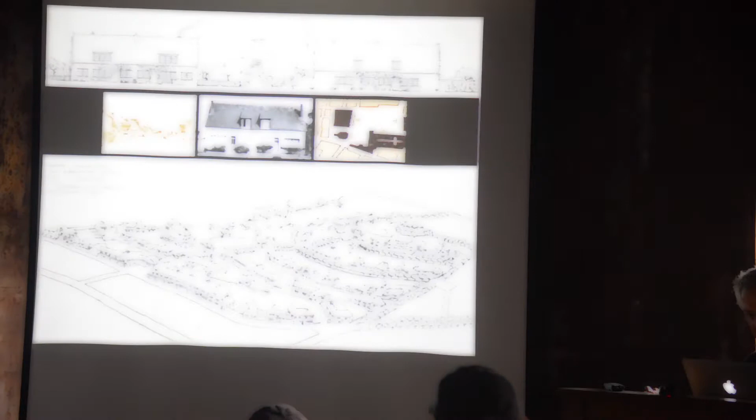By the way, Le Corbusier was quite a good town planner. This is one of his garden cities. If you look at this, I'm editorializing here, but this garden city, coming down a hill, is actually so much more fabulous mechanically than Raymond Unwin. You can see he's a great architect.

What's important is that we're talking about a really brilliant architect, this kind of thing. And of course, he became obsessed by this kind of stuff. By the way, note the car, great coincidence, etc.

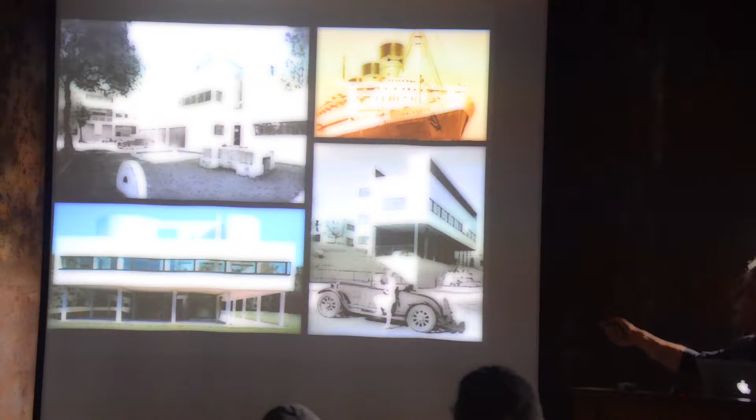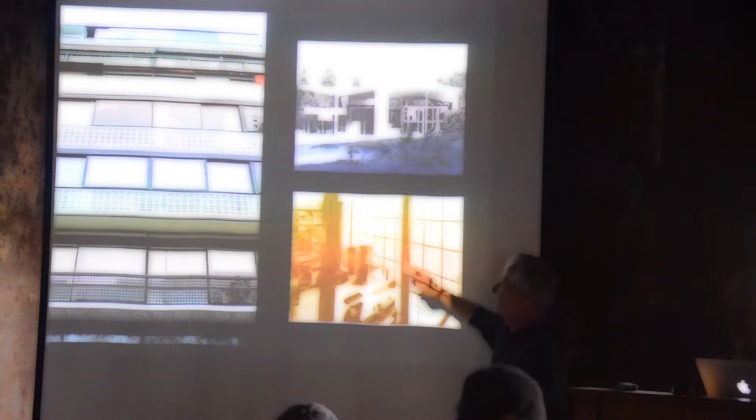He became obsessed by, this is Pierre Chareau. By the way, this is a fantastic building in Paris, done in the 20s, that I think should be considered a classical building. It's steel, beautifully built, full of metal craftsmanship. This is the Maison de Verre, Pierre Chareau, great tile, great concrete, great glass block, etc.

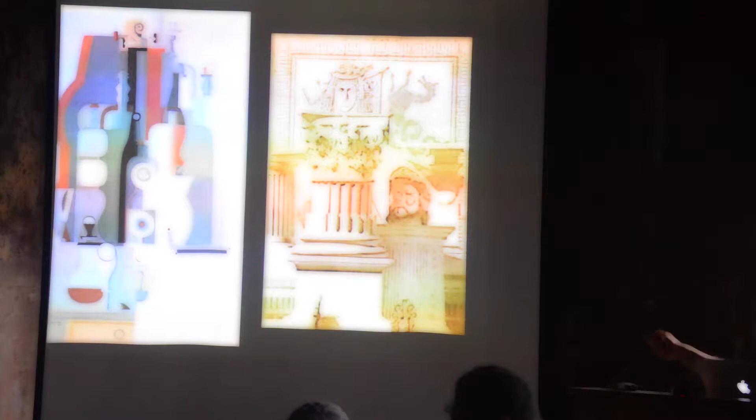He was a great machine aesthetic, and then he goes on to denigrate Le Corbusier and say that his obsessions became sicker and sicker, like the Béton Brut. Actually they were all obsessed by the Nazi coastal defenses, the fortresses. Le Corbusier knew very well what traditional architecture was like.

Including what's it called, this exercise, the analytique. This analytique actually forms the basis of all his paintings, which, by the way, in Leon's opinion, Le Corbusier is one of the great modern painters of the 20th century, not one of the great architects. And I actually would agree with him.

He did many, many paintings, and they're absolutely extraordinary. Leon, by the way, who is a brilliant original genius, actually spends a lot of time copying his paintings, which goes to show you what tradition involves.

Like he, you know, Leon can paint a traditional scene. He can paint a landscape like anybody else, and he also paints the Le Corbusier. His house is full of these Le Corbusier paintings that he did himself.

And then the Maison Domino. By the way, this is one of Leon's. This is something we should know. Leon's many drawings is what converted urbanism.

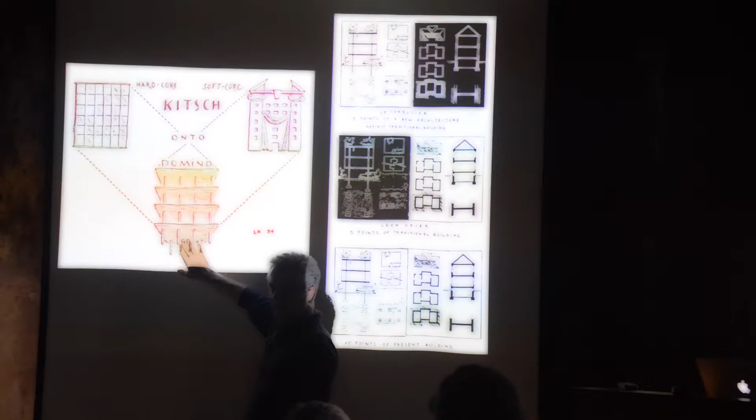These are sarcastic little cartoons. And I think there's a book by MIT, called Drawing for Architecture by Leon Krier. Out this year, very inexpensive, red cover.

And in it are all the 50 to 80 diagrams that explain everything about architecture in almost a cartoonish way. And it should become the fundamental... you know, they're very thick Leon Krier books.

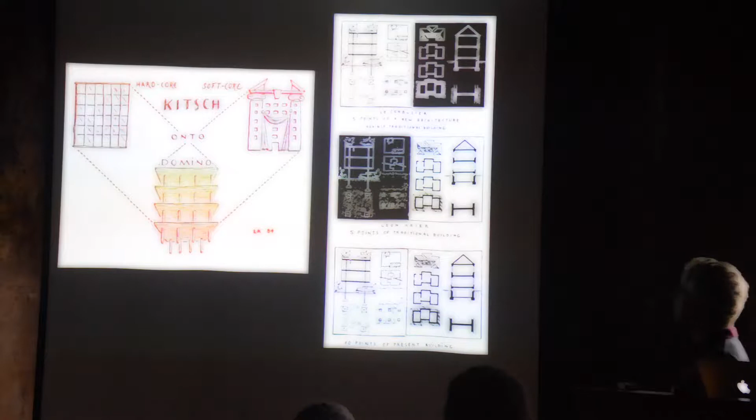But all the cartoons have now been collected in an MIT book that I think should become one of the great textbooks, if not the textbook.

And look at Le Corbusier's polemic: bad, good, you know. And this is where he presents the houses on pilotis, the independent structure, all of these things. Basically, this is the thing. This is the Le Corbusier: good, bad.

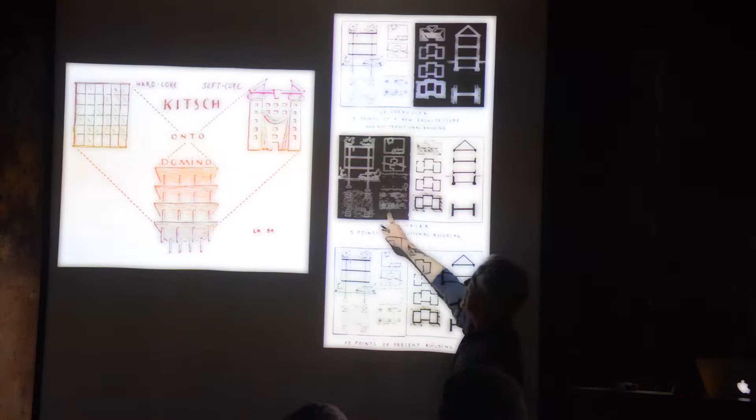And then he says, what Leon says is, this is presented as bad and that is good. And basically what he did is he takes Le Corbusier and reverses it, saying, this is like the bad one that I have to improve. He takes these and says, I've got to make them good.

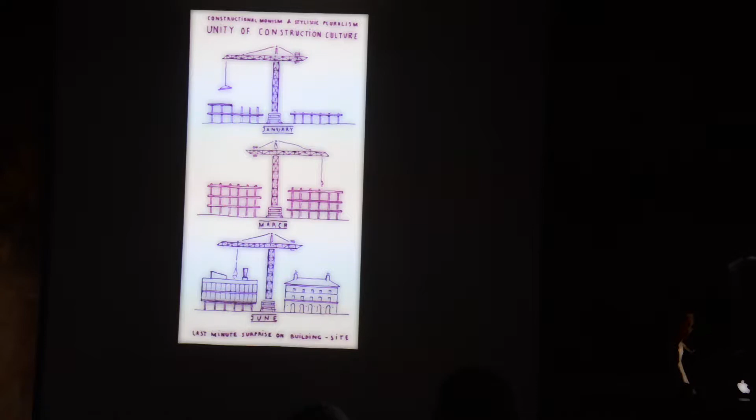So he reverses the mechanism, the transformational mechanism, and he talks, these are the great diagrams that have converted so many people. And I emphasize, this little book should become almost like the first grade book of the students.

He makes fun, and all of these are great points to be made. I don't need to repeat it. They're great points. This is interesting.

Did you know that Mies van der Rohe had an interior like this? That when he lived in his glass house, he was full of traditional furniture, which I actually didn't know. The future of Mies-anthropy. And he says people come to worship. Look at them praying.

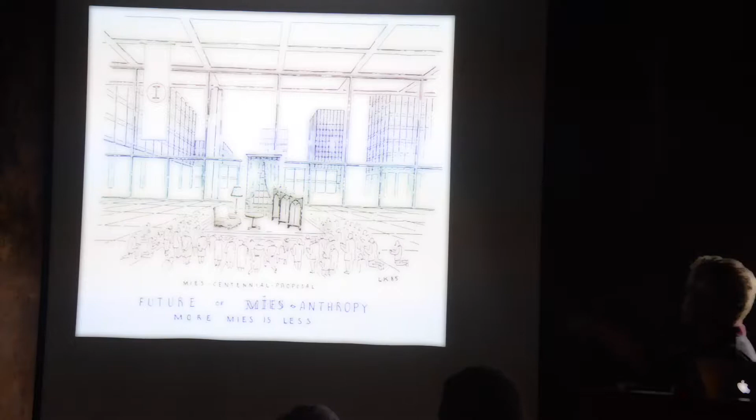This is what's left over of the old civilization. Andy Warhol and Jeff Koons is the same thing. Yeah, well, Jeff Koons is having Peter Benoit build stuff. Yeah, fantastic.

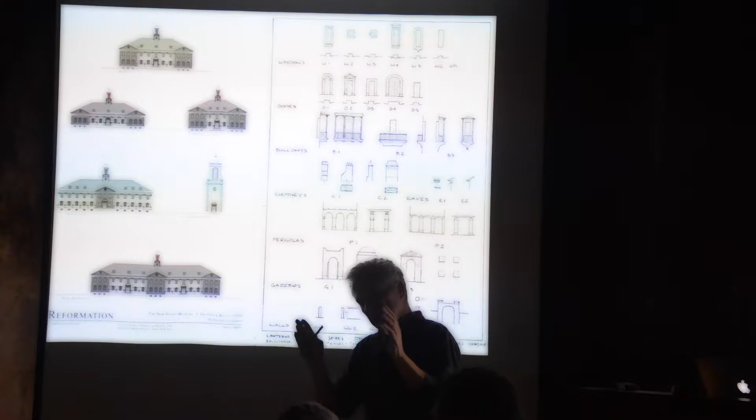Absolutely fantastic. Leon says that traditional architecture is absolutely systematic, and I'd say locally it is, not internationally. But it's actually the most efficient system to design. One of the things I'm doing, I'm teaching in Miami now, and I'm going to take a little side track here.

Rem Koolhaas has written that Chinese architects are 200 times more efficient than American architects. One of the things they do is get the floor plans, work with very tight Chinese codes, go to a magazine, find a facade they like, photograph it, Photoshop it, straighten it out, find out who spec'd it, and call up and say, give me facade 5648.

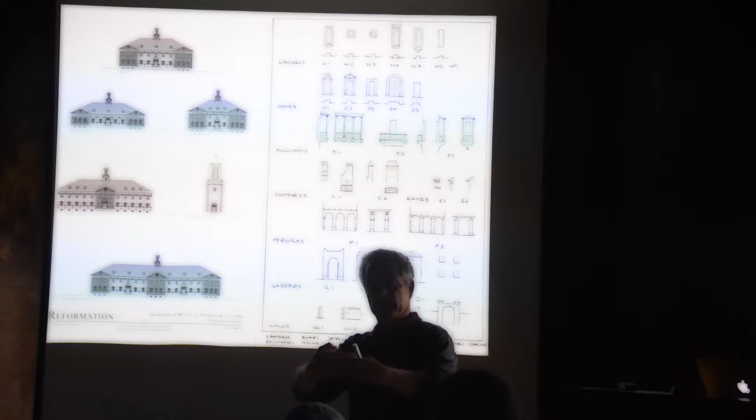That's one reason there's so much glass architecture. I'm editorializing here, but it's because all you do is pick up the phone, somebody else details it, somebody else installs it, and somebody else takes the liability. If you do a traditional building, you better be there to make sure the windowsills actually shed water, and every junction between trades, the wood trade and the masonry trade, is your problem. I've been sued for that, because some fucker just couldn't get the damn window right. That doesn't happen with a glass wall.

We have to confront the fact that there's a reason people do glass facades, we can't just say glass is horrible. If we don't understand that classicism has the ability to deliver very efficiently, we're not going to get it. More editorial on my part.

I'm teaching these kids to make the Chinese architects only 100 times more efficient instead of 200. I want to cut it in half. We drew well-proportioned windows, all well-proportioned. Do you know why there are no ugly buildings prior to 1940? Because nobody made a badly proportioned window, you couldn't choose one. Not like now, with these grids where two-thirds are badly proportioned.

So we went to the books of the 1910s and 20s that have the perfect moldings, drawn full size so they could be traced. The classical treatises of the 20s became very professional, they traced the moldings, traced the columns, you could order them up. We put all that on the computer, and I showed the kids how to do one facade a day, in fact 3 variations of the same facade, and within a week they'd done a whole series of buildings very quickly.

Again, the whole thing was about efficiency, about being beyond good enough. One of the ways I taught was by projecting, having a CAD job up.

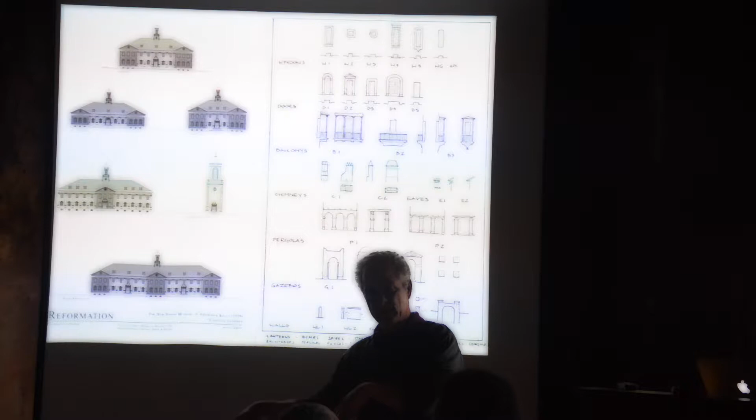One thing I tried to do was undermine the sacrality of design by telling them, hey, this is only a little house, it ain't a temple, it isn't the opera house. Can we just cool it? This is a little old house in Boca Raton, so just calm down and try to do a nice job, and let's move on so we can have a beer by 5 o'clock.

The kids all designed this stuff, but the other professors had made design so difficult that you actually have to bring it back down to what is normal. That's what we were doing.

One other anecdote is important. The reason arts and crafts disappeared around 1900, and even Voysey couldn't get any more work, is that site supervision was too inefficient for the Edwardian affluence. They had to build South Africa, they had to build India, they had to build capitals everywhere.

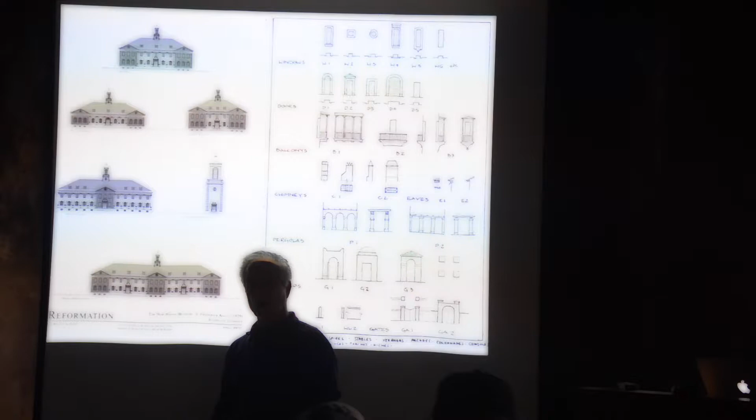They couldn't be there saying, hey, could you do this brick a little bit better? And classicism could deliver. They said, could I have 36 columns in Indian limestone, Dorics, and 24 feet wide, and they would arrive in crates, perfect. And the moldings would arrive in crates.

Handmade, okay, they weren't machine made, they were made in India. But the sheer efficiency of classicism is something we have to put forth. It is the one open shelf prefabrication system we have. But the modernists have closed shelf systems.

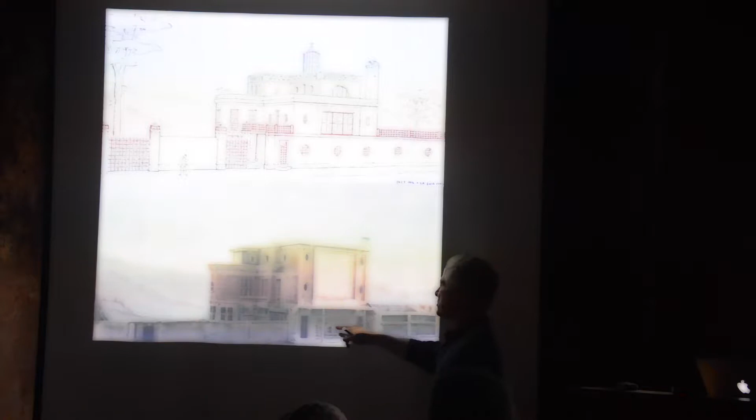So this is the house, Leon draws it, he basically fixes it. This stupid symmetry, this is for the masters, this is for the servants, this stupid idiotic house, and he basically makes it intelligent. So that's the first thing, he makes that house intelligent. The meaningless, lousy urbanism, he fixes it. This is the first one he did. And the Corbusier plan that didn't work right, he fixes it.

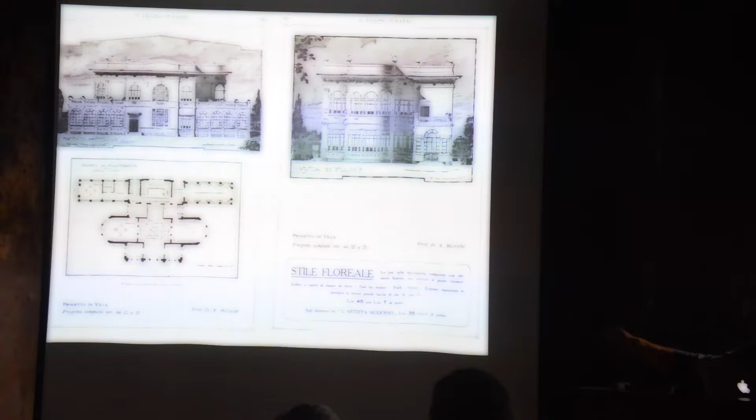And then he goes on, he says Le Corbusier even copied it. This idea that it was original is ridiculous. Nothing Le Corbusier did is actually even original. It's just he knew how to hide it.

He says, this is the best view downhill. What is that? Let's do it properly for people. And so he very carefully redoes the facade.

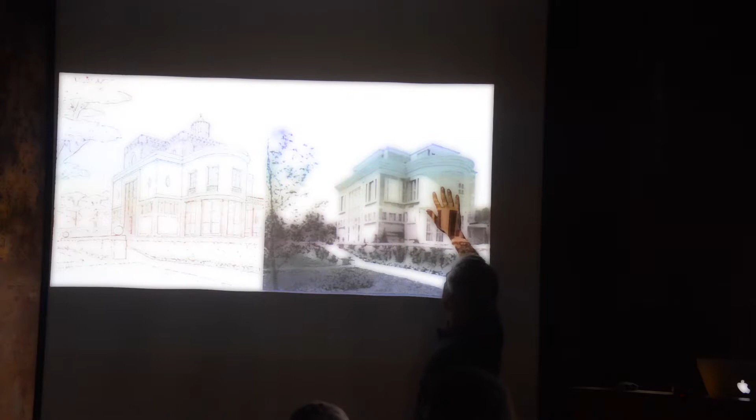He says, this is actually the bathroom, this is the bedroom, and that's the bathroom. He says, what gives? You know? And he actually fixes it, like that. So it's a pretty funny lecture.

Leo sits there saying, oh, he was obsessed with hygiene. Le Corbusier was obsessed with hygiene. Everything had to be clean and everything, and it's in his writing all over the place. Like the bathroom makes perfect sense, it has to be clean.

Yeah, but you know what's wrong with that? He was obsessed with sex too. It was great, I'm just saying that's why.

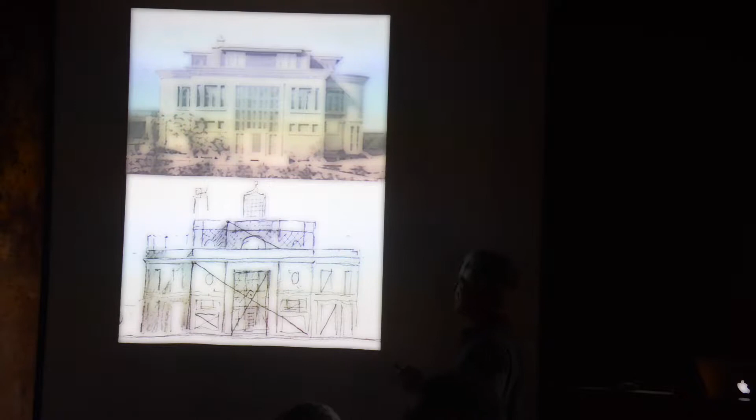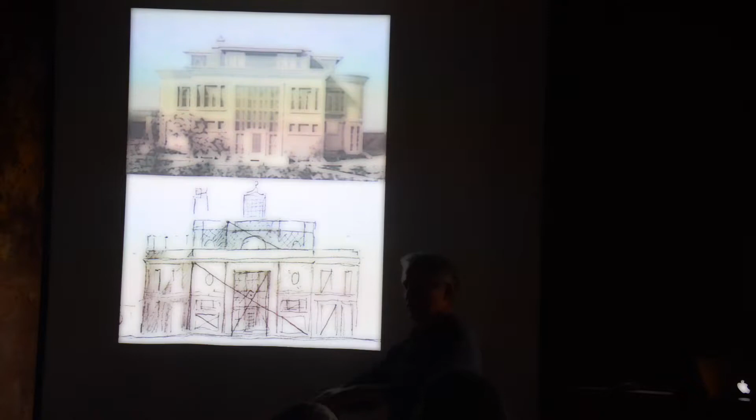No, and by the way, he said that, I forget what this was, but Le Corbusier actually, this guy was really good with proportioning devices. He was very good, and I've always found that the proportioning devices are the secret handshake of the modernists who actually would be classicists. It's like saying, we have this secret handshake, I can't do it, I'm not allowed to do it, but that's what I found by studying the orders.

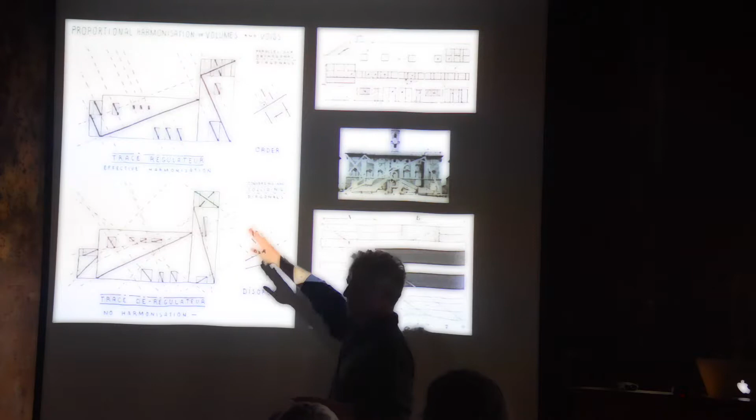More Corbusier, he was good at bad sketches, everybody improved, and he shows how he teaches very quickly what a transfer of proportioning system is as opposed to the modernist mess. This is one of his great drawings that actually teaches the kid immediately what it is to do proportions. There's too much mystification in the way architecture is taught, and Corbu was really good.

And this is Corbu actually being classical about the windows that he uses in all of his buildings. He had them worked out.

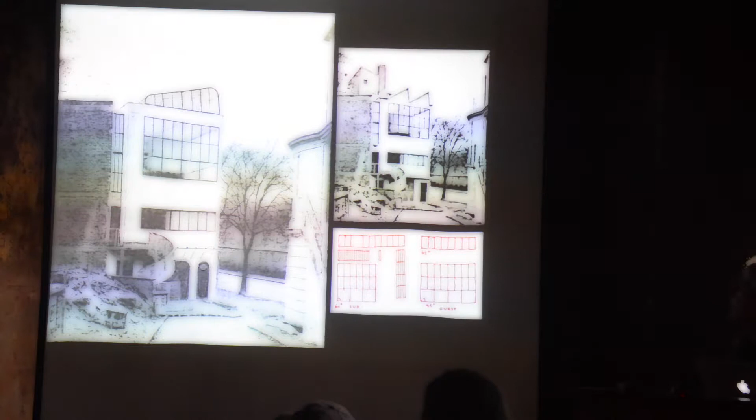And then he goes on and corrects some very awkward things. This is a Le Corbusier building, this is the correction by Krier, and he corrects it.

And this is quite famous, this is called the immeuble villas, and they're apartments that are L-shaped. Actually, what ultimately Krier loves is the partis are great. The modernist partis are fabulous. First floor, this thing floating, double height space, light coming in down there to the back of it. Great, great stuff.

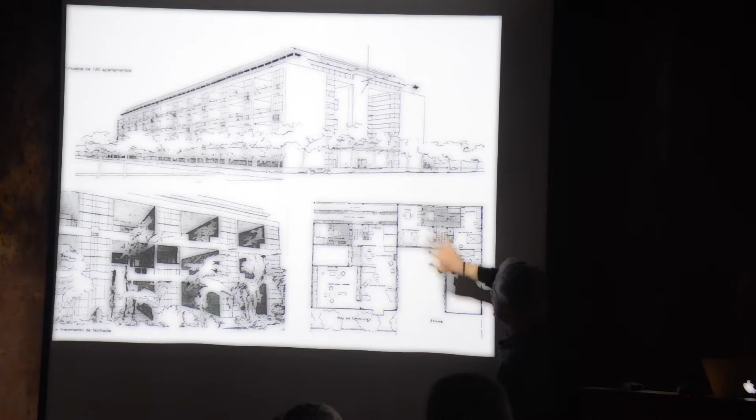But it says the damn thing looks like hell, and so he redesigns it, he redesigns the immeuble villas. And here you see what they're like, the double height space.

And this is where Leo starts coming into his own and actually creating really wonderful traditional buildings. This, by the way, is a model of a single apartment done for an exhibition in 1925. This is a single apartment in that building, double height space, double height exterior, the tree growing through it, and then Leo redraws it.

And he says this is what should have been done if just the talent had been maintained without the ideology. And you can see just the delight, how delightful this is, you know, you can just get into this stuff.

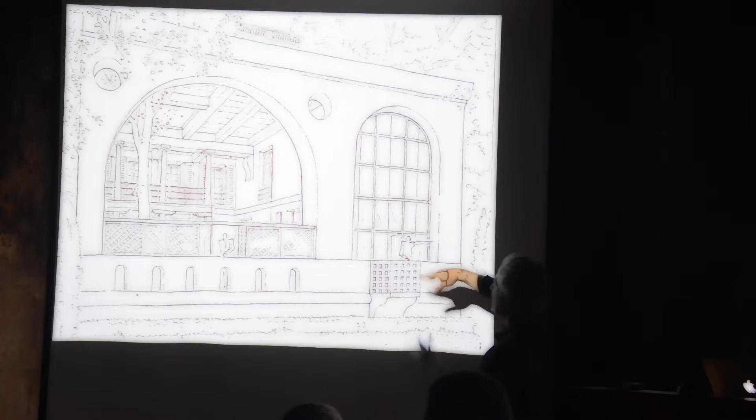Look at this guy here opening the shutters, the balcony within a balcony that looks down, the tree, the beams, but look at this, and this is what gets me. This is what's great about Léon's architecture now that he's finally figured out how to connect it. Look at how these two arches have different spring points.

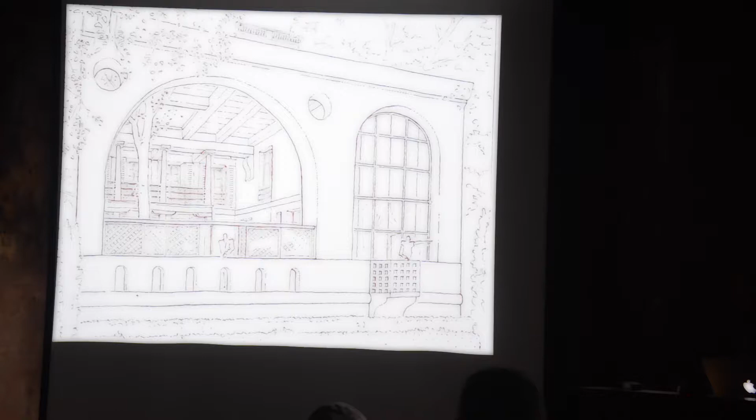Can we kind of recover the vernacular mind? And this is what he's achieved in his 65th year. This kind of stuff can actually, it's so tolerant, the architecture that he's developed.

He fixes the site plan, and he actually begins to make an urbanism. He says even if you retained the modernist architecture, you can make a traditional architecture. And so he creates another piece which is actually modernist. This is fabulous.

This is very important to what you're doing here in Charleston. He says that when you do an addition to a traditional building, you're forced to do it in a modern style to differentiate it. But when you do an addition to a modern building, you don't have to do a traditional style to differentiate it, you get to do it in a modern style. You see the problem? So I win, tails you lose. What? Is that heads you win, tails you lose? That's what it is.

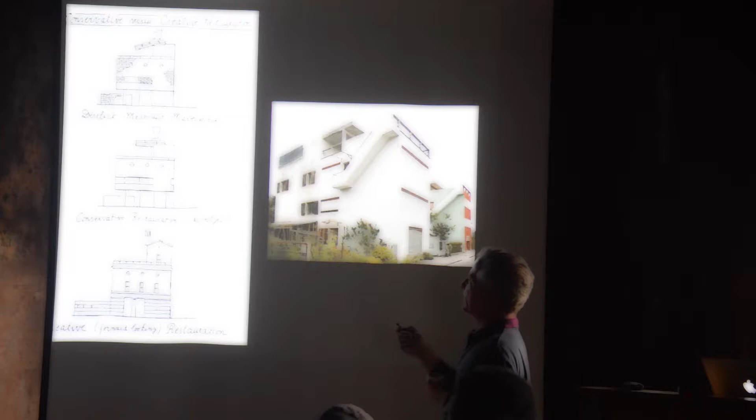So here's the bad building, and he says, well, you have to restore it, etc. But that's because of the theory of the zeitgeist, that this is not an expression of the spirit of our time.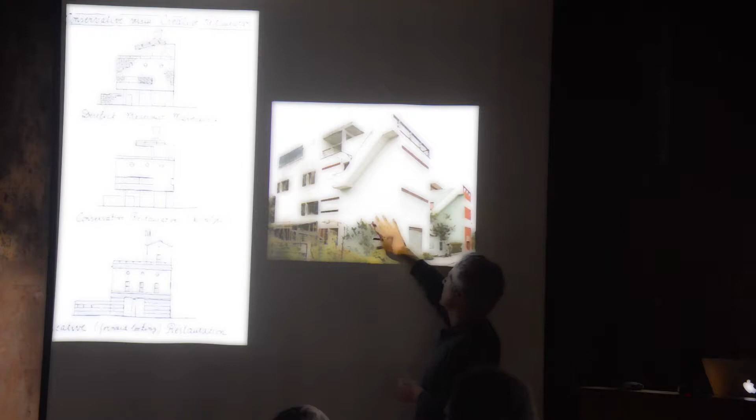So these actually became decrepit, famously so. This is a place called Pessac, very early 1920s, and it's about 50 or 60 or 70 housing units, and it's decrepit, but they were all restored modernist.

And he said, what happens if you actually follow the Charter of Venice? And this is a thing which he says you can always prove—you can always improve the urbanism, even if you don't change the style, okay? You can always improve the urbanism.

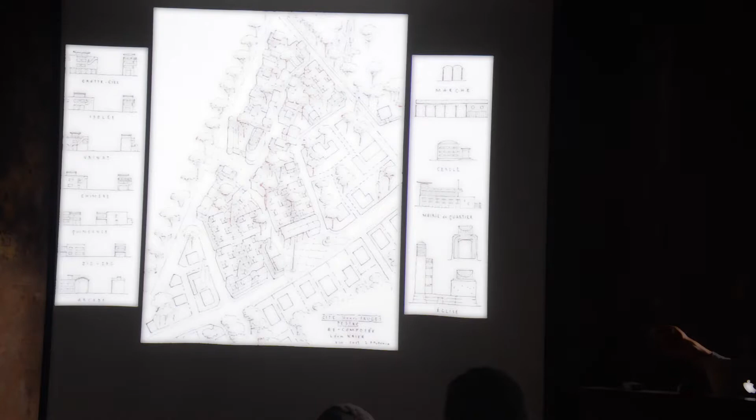And he says, here he shows Pessac and how he would improve the urbanism, right? Pessac existing and future. This is Pessac the way it is, which became decrepit. And then he begins to actually fix it.

And he begins to add buildings, right? To actually make an urbanism. This is a whole agenda here, when he completes the thing. But where it gets interesting is when he begins to, oh, by the way, look at this.

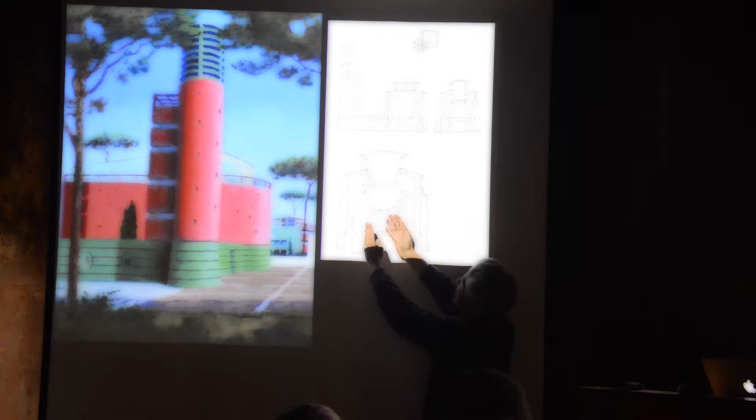This is so fantastic. He creates a city hall or a chapel, where the light comes in, there's a flat roof, and there's a fresco, that the light comes around it. So you look through this dark cage of columns to this lit landscape. And this is what's good.

He takes these buildings, which are like this, and he begins fixing them. See? And they're perfectly suited. There's nothing happening on top. He adds a floor. He just begins going with them. He begins adding and adding and adding, actually creating an architecture.

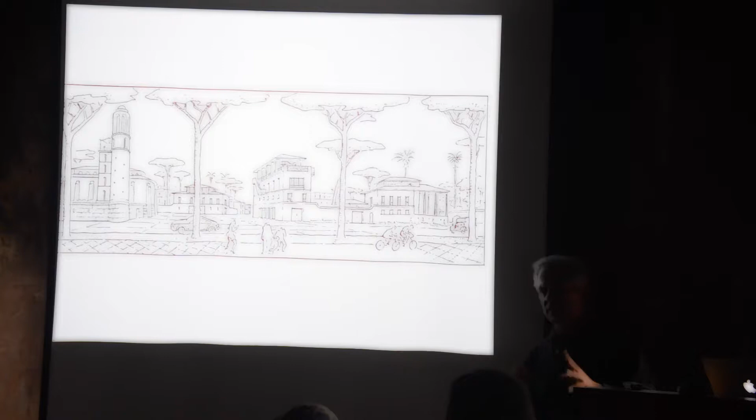Now, what I think is extraordinary about these modernist partis is that they're very modern, relatively asymmetrical, very agile, and they give you ideas that you wouldn't otherwise have. You may stumble across this building, but you're very unlikely to do it if you're looking at the traditional architecture of the 16th and 17th century. If you look at modernist architecture, it develops an architecture with localized symmetries, big and small spaces, etc. So you get the best of both worlds.

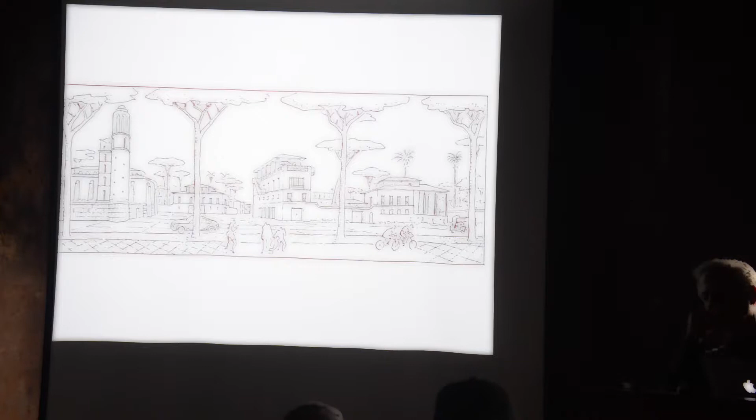And by the way, he says there's no way that we can do without the ribbon window. We need it. It was a good invention, but it has to be made out of individual buildings. Which, by the way, Voysey used to do it. So did Frank Lloyd Wright. And so he takes it and he fixes it.

He takes the Corbusier building, fixes it. Fantastic. He takes that floor plan, fixes it, and he goes in and says, 'This is absurd.' The way that Corbusier would sacrifice the client to conceptual ideas is really stunning.

So he always fixes things, and I think this would be a really good exercise for a student. You give him a Corbusier floor plan. You say, 'What's wrong?' 'Well, you can't see here. The double height space is really mean and small.' How do you actually fix a bad parti like this as an exercise?

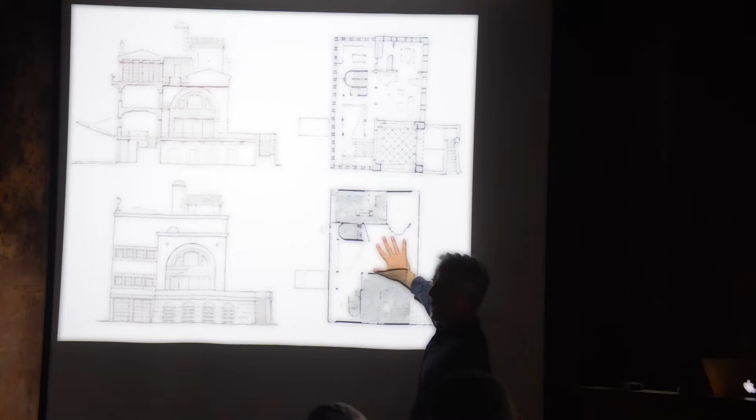Instead of saying, 'Hey kid, why don't you invent it out of nothing?' Which is like, what's that? Where's the tension in that? Why not learn to fix modernism? So give him a modernist building as if it were a problem, and have them fix it, and that tension really teaches them something.

Before and after, right? Before and after, fantastic. Before, after.

Before and after, he's developing this fantastic vocabulary, which is incredibly forgiving. One of the things about this kind of architecture, unlike high classicism, is that it's actually more or less six inches, give or take. It doesn't matter. The mason can be a slob, it can be up and down a little bit, it's not the end of the world.

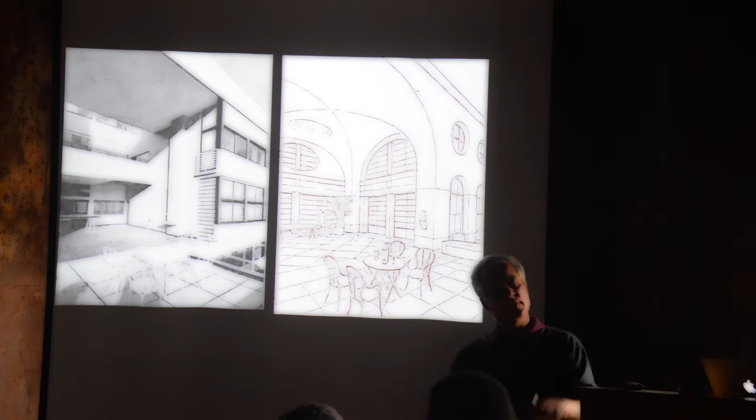One of the things that happens with both Miesianism and Renaissance classicism is that something that doesn't align isn't just a little problem, it's a discombobulation of the whole process. And what I find is that with Orthodox classical architecture, it's just too unforgiving for what we have in terms of the current workmanship situation, the available workmanship.

Well, this stuff is fantastically forgiving. Not only can it age and gain patina, but it can actually tolerate bad workmanship. This can't—I know that for a fact. Okay, all this stuff, and then he fixes it.

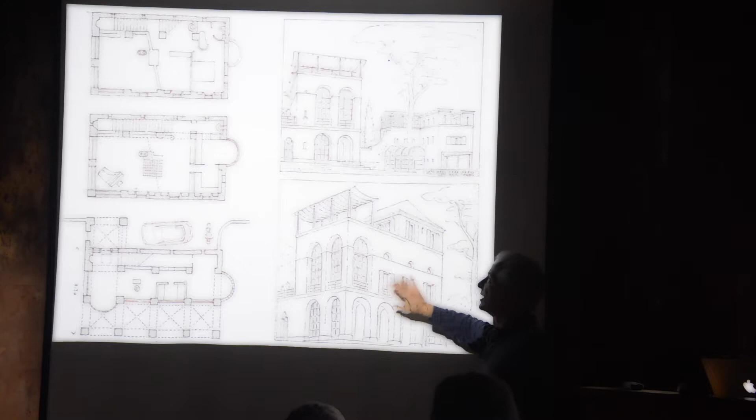But absolutely delightful. When you get partis like this—where would you come up with a parti like this? You wouldn't, because you can't, because it's not coming. Your genetic material that you're working with doesn't allow it. This can only come from modernism, and it's fabulous.

I don't think it can come from original architecture, not even the Wagner school that could do this. I really think you have to confront first-rate modernism and make it traditional for what it can contribute, which is just much more genetic material.

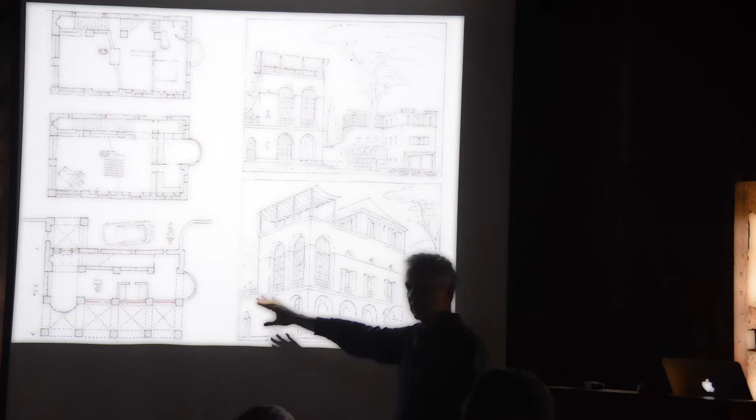And by the way, the reason traditionalism is really on our side is that the semantics are populist. The floor plans need to be open, they need to be flexible, they need to have cars, and all this stuff. But the semantics are where they die—people can't stand the look. And so that's almost the perfect combination.

I think he's really onto something with this. Look at these partis—fantastic. What an exercise for a kid. You say, by the way, kid, don't worry, you don't have to spend the next three months figuring out a floor plan. Here's the floor plan, go to town.

Show what the Ferrari can do at the edge of the precipice. Risk it, just risk it, instead of just polishing. You know, the analogy I made—

Yeah, we've reconstructed the car. Those who restored the car, the first generation of classicists who restored the car—that was incredibly exciting, that was difficult. We figured out how to do it, we found what a carburetor was, and we restored the car. And the car's sitting in the garage.

Now we're asking the next generation to come up and say, by the way, come polish the car, this beautiful car, come admire our work, and I'll tell you stories about how we found the carburetor under the cow dung. Well, you know what? The kids aren't going to do that, because that car of classicism not only looks good, but it can actually perform.

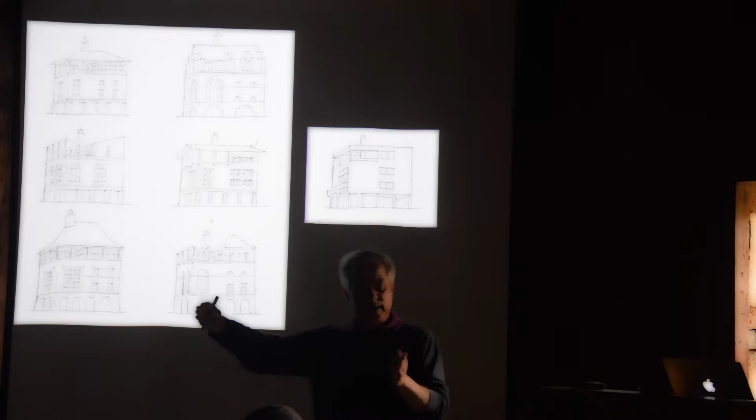You can take it to the edge of the precipice and amaze the world. There is nothing more amazing than a classical building by Plečnik, because he takes classicism to the edge of the precipice. It's absolutely fantastic, the performance, right? And it's not a video, it's a real building made out of stone on the edge of the precipice. And by the way, the cool thing is that sometimes he falls off and it's a piece of shit.

Wow, that's half the time what Gehry is doing. He's actually taking an incredible risk. The risk of failure is something that the next generation wants. This business of certainty is not going to get the best minds. We're not going to have an elite if all we do is play it safe.

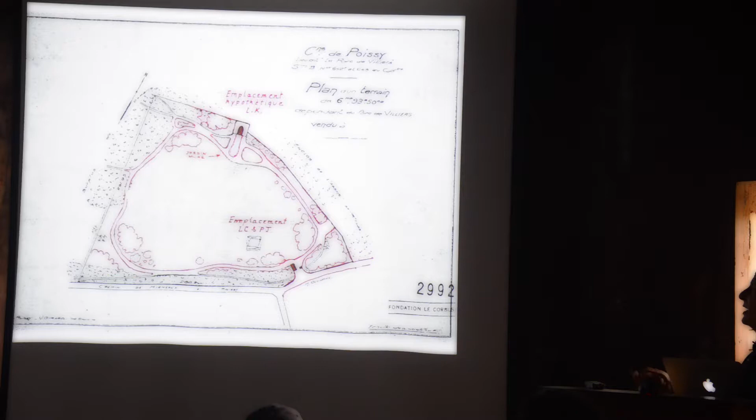He fixes site plans. Corbusier did idiotic site planning as often as he could. See these cartoons? These cartoons explain everything a kid needs to understand. You know what I would do? I would take the 50 cartoons by Krier in a course and say, write up a little essay on what this means. What does this mean?

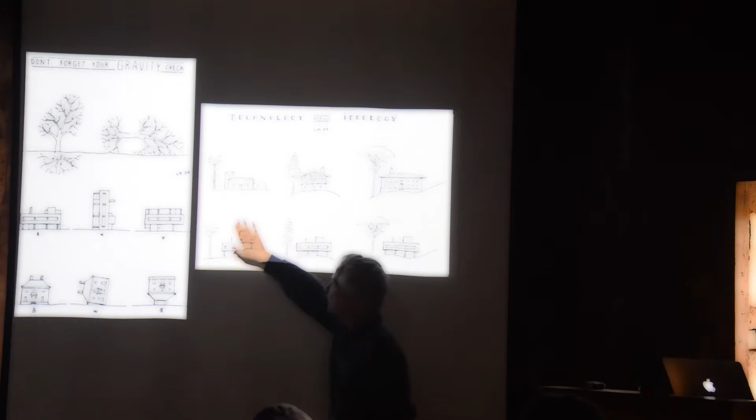What's Krier trying to say about local architecture? What is Krier trying to say about top and bottom? Just a little essay, write 2 paragraphs, I'll grade you on it.

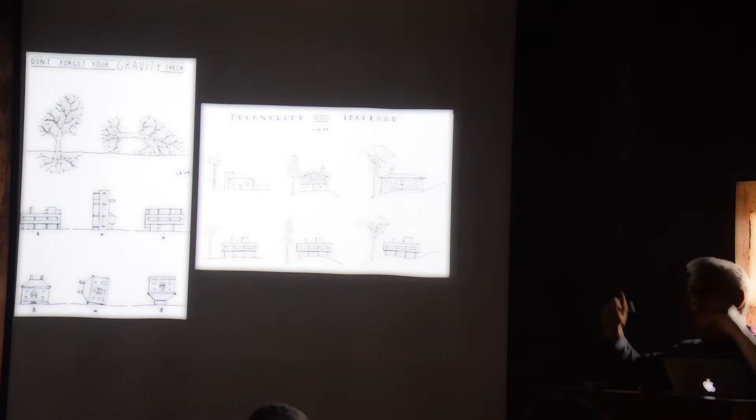Instead of being spoon-fed what the idea is, the kid has to figure out what's being communicated. That course is all the theory they need, and it vaccinates them against modernism. They don't have to do anything else, and you can go home early for a beer. That's the best part. The whole idea is excellence quickly achieved.

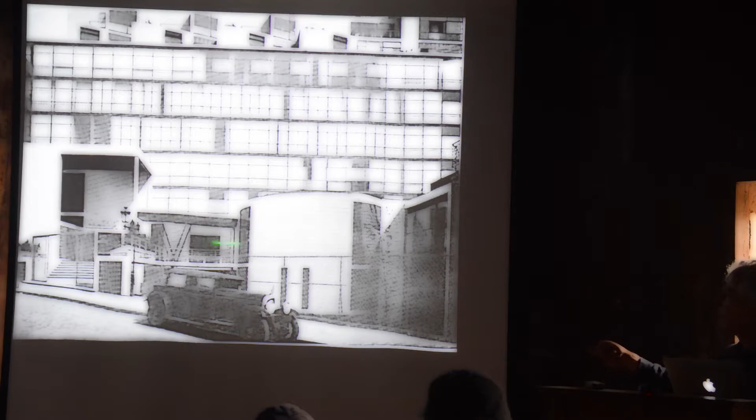Fixing it. Okay, this is a house by Corbusier. Leo fixes it. Oh, this is the Salvation Army, which is a fantastic entrance sequence. I don't really know, you enter here, go here. It gets fixed so that it isn't really decrepit.

And then he goes ahead, and this is the stupid site plan by Corbusier, which then he fixes. By the way, the stupid site plan, of course, turns into a disaster later. Leo fixes it with the small blocks. And then he talks about the Modulor, which he believes in a lot more than I do. He actually thinks it works. I don't think it works at all.

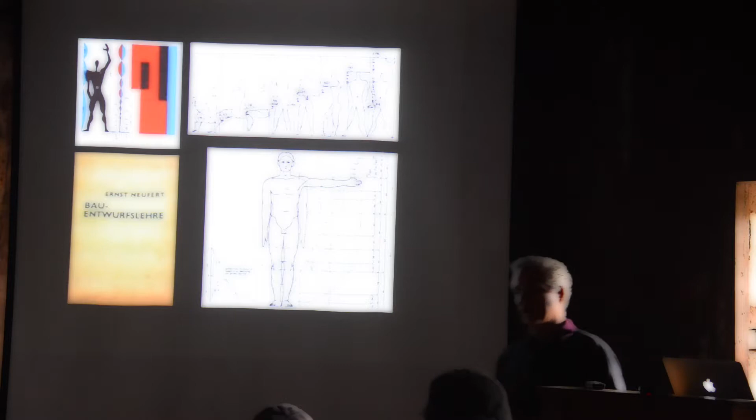Particularly since it worked so badly that Corbusier had to write 2 scales, one for the Frenchman and one for the Englishman, because the English were taller than the French. Now come on, how can you have a universal dimension that doesn't work for 2 countries that are adjacent? The whole thing is completely corrupt.

And then the obsession with the Nazi stuff, which is actually gorgeous, but not what you do. And he goes on like that.

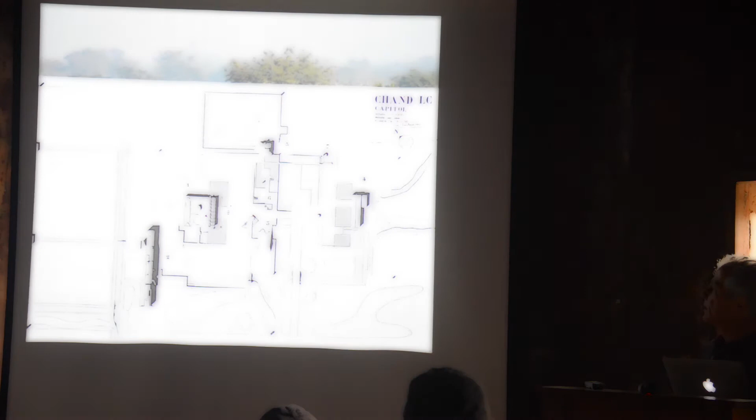And then Chandigarh, the other thing, another example, is to take the modernist site plans and urbanize them. If these are the great civic buildings, give this to a kid and say, kid, this is just the beginning. What's the next generation going to do? Fill it in with urban fabric. And that's an exercise that has been done since the 1970s.

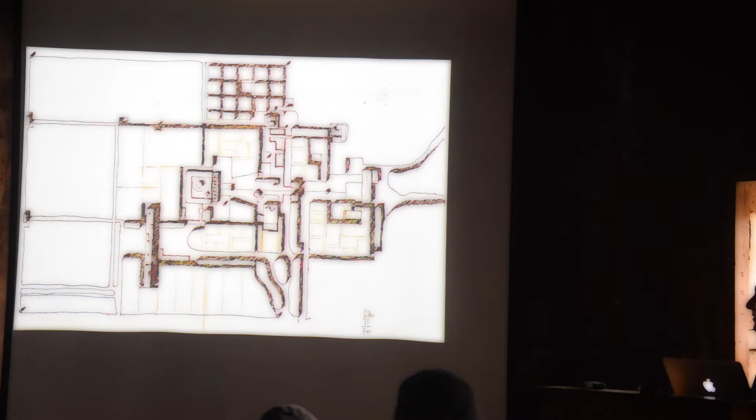This is 1970. By the way, this is Rodrigo Pérez de Arce. In my time, he was a hero, one of the best known names, because he took every site plan by the top modernist architects and retrofitted them with urban fabric.

The Kahn in Bangladesh, the Le Corbusier in India, he took every famous modernist site plan, Boston City Hall, and fixed it. And that was so stunning. That was the ultimate counter project. They were the original counter projects.

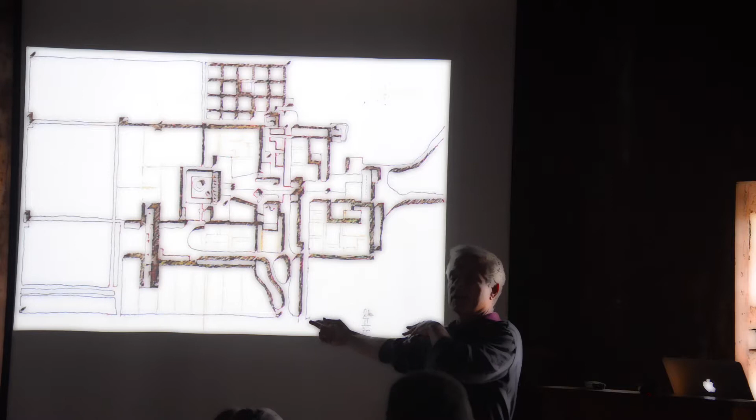And by the way, the great thing is he did them in the style of Le Corbusier. For example, this is Rodrigo Pérez de Arce urbanizing the downtown of Chandigarh in the style of Le Corbusier. And he would actually urbanize it in the style of Kahn. It wasn't a style battle, it was actually an urban, disurban play.

Le Corbusier, among other things, really did understand, at the end of his life, he would say, la vie a toujours raison. Life is always right. Okay, and later his buildings, like the town center in Chandigarh, and by the way this is in the 30s, look at this. Look at the little styles of houses filled in here.

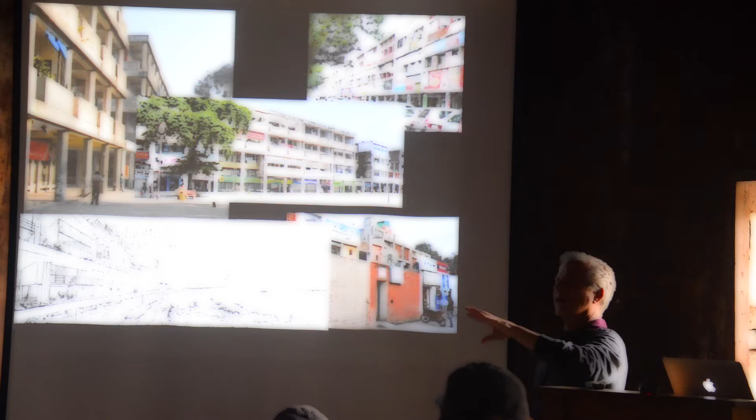I think this idea of a resilient architecture—somebody said today that the outside is stable and the inside can change. That's not true. The outside also has to take additions and modifications and so forth. I think that as a separate exercise, how tolerant is your building of the changes that history will impose upon it is one of the things that all the kids need to confront.

And by the way, let's wait until we actually figure out how to do it ourselves, because we don't yet know how to do that. Obsessions with airplanes, whatever.

He takes, for example, these enormous buildings and cuts them up into an urbanism. So here's Krier—this is what the Yale students do. When the Yale students this year, he gives them Le Corbusier buildings that are actually anti-urban, and they have to scan them or do a SketchUp on them, and then take the components and make an urbanism.

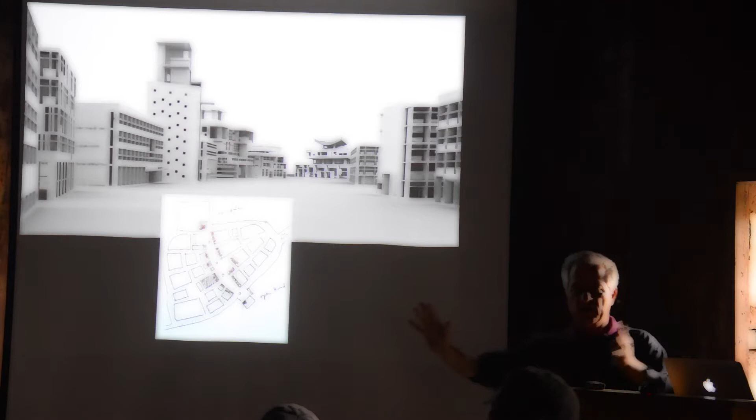You always separate style from urbanism. I think it's pretty healthy to do that. The governor's palace in Chandigarh, properly done.

Look at this guy. Oh God, this is so brilliant. I hate this building, but look at what it gives you. Just look at that architecture there. Look at this arch back there. Look at this arch coming forward on this bracket, and then look at that arch doing like that.

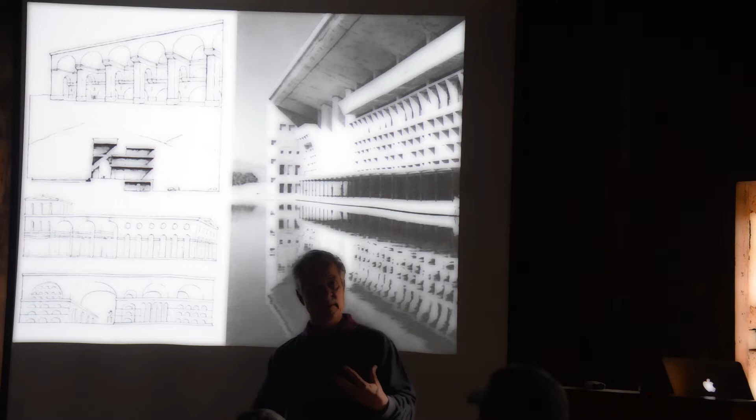I understand, okay? But would you ever have thought of that if you hadn't been confronted with this problem? I don't think so. I think you would have reverted to something like the Basilica at Vicenza. As somebody actually told me, why would we do this when we have the Basilica at Vicenza? Well, I don't know what to say, because I'm sick and tired of the Basilica at Vicenza. And so are the young people. They want to see something new, something exciting, something creative. We have to confront the fact that they don't want to hear about the Basilica at Vicenza anymore, any more than they want to hear about the dark furniture. At least some of them.

Andrés, go back to that. I asked Krier why he puts these big slashes through things.

No, on the plan. This? Yeah, this hatchet? No, the big slash in the middle, where it's wider than the other streets. Yes, because it's the main street. No, why? He says every city needs a Thames, which is to say that this morning Patty took me around Ion, and I got so lost and confused, and it needed a Krier slash through the town so that you can reorient yourself and know where you are.

Okay, well, actually that happens in most of our plans. I thought that was very interesting. He told me that. I think most of our plans suffer from that, the DPZ plans. I don't think Ion does because of the two lanes. Well, think of every city needs a Thames. By the way, in every city, it does have a road that goes through, the main spine road called Shumway. You were probably given a really bad tour.

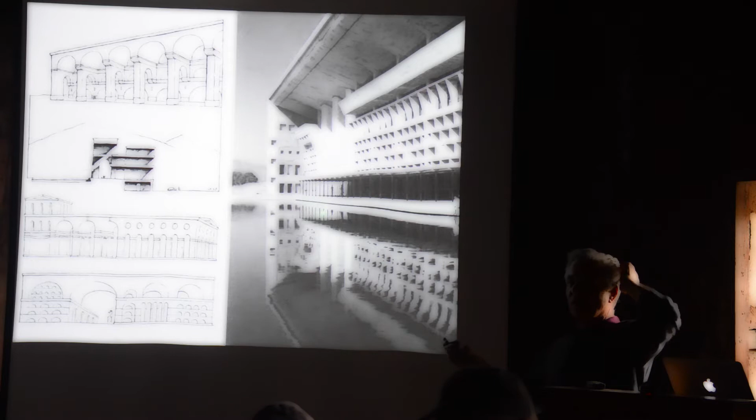But this is also fantastic because it demonstrates, in a way you don't even have to explain, that classicism is progressive. We are leaving this shit behind, we are building on its grave, we are the future. We don't have to leave it behind, but we don't have to not leave it behind. But it's fantastic because by incorporating it, we are visibly consuming it, taking it into our stomachs, digesting it, and building new classical muscle with the protein model. And by the way, these are all counter projects. For example, see this play here of this arch with the light coming in from behind, the way that happens?

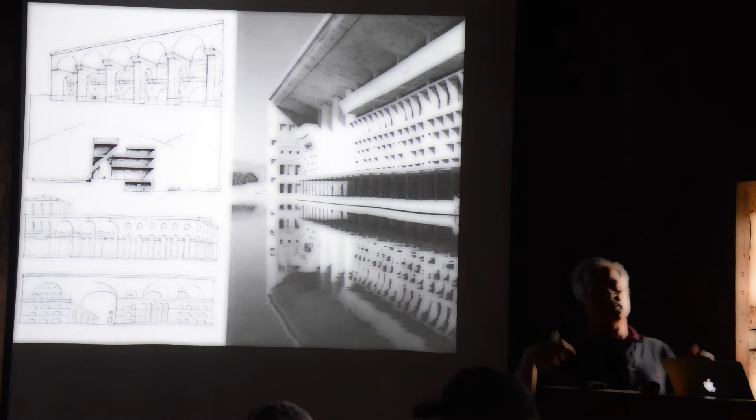That kind of reverse thing is a modernist trope. Even though, yes, the Romans could and would do this, the stimulus, the grit is still necessary if we're going to move forward, apart from the polemic that hadn't been thought of—that we are building something, and leaving this in its grave.

I've got a question. You mentioned the Basilica Palladiana—wouldn't that be an interesting exercise to give students, to say reformulate that with something, just like you would with Corbusier? Yes, that would be interesting. If the lesson is that modernism needs repair, how would you do this in a small town with half the budget? That's an exercise.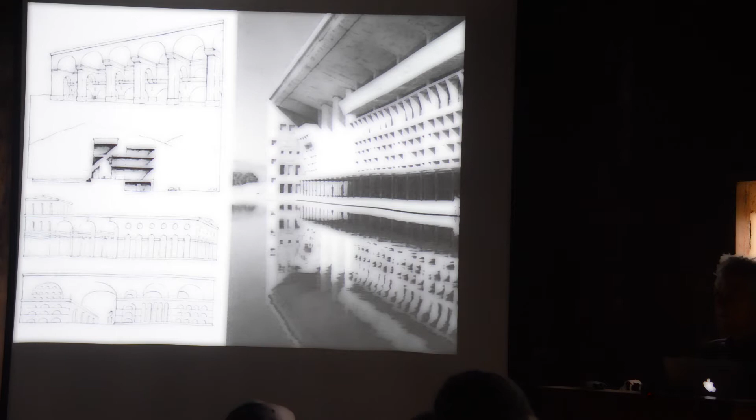That'd be interesting. It also brings up the idea of having something to talk about. By the way, he's never done a Renaissance order—it's always highly expressive of something. For example, this is an old civic building from the old days, and it's incredibly open and light.

And yet, this is where—who did the museum in Chicago? With the museum, the new one. Piano, okay. If you look at the Piano Museum in Chicago, which we drew up for Heterodoxia, it's got a very tall column with a capital and everything, and people say that's not classical. Why do I think it's classical? First of all, it's got a capital and everything else. But Krier actually opened my mind.

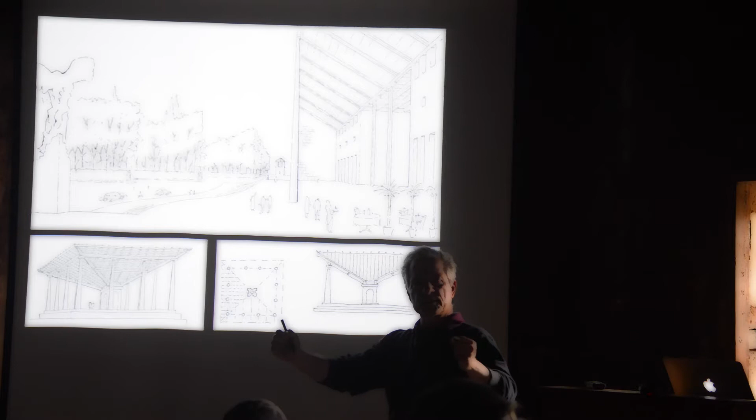You see that, and that, and that. That's what Krier did—he's always broadening the language, opening it up more and more, and it generally has a lot to do with construction as well. He's very careful about this. See that log he uses all the time? That round thing actually resolves beautifully a problem we all have—the angle, and how you take that angle with a rafter and go vertical. He uses a round telephone pole.

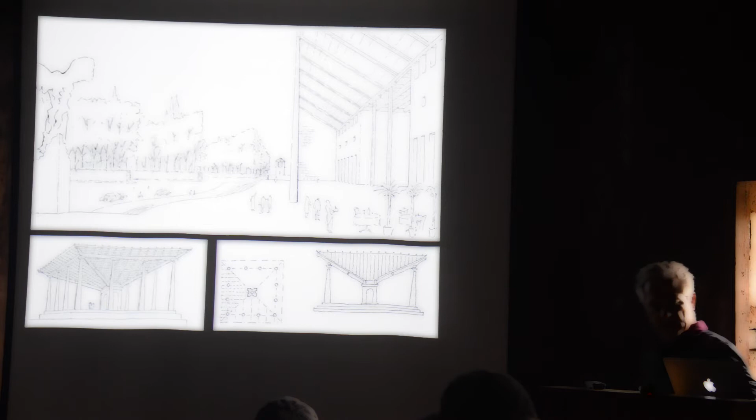So this kind of vocabulary, I think, should be entered—some of it fails, by the way. You know what I love about the Ferrari crashing? I think the Ferrari went completely off the precipice here. Boom—Corbu won. It's just better. I think Krier lost, and I love that. I love the fact that you risk it and lose, because it means you really commit. This is a render.

Fabulous thing—by the way, I post this on the internet. One of the reasons I'm kind of grumpy about the discussion is that I post this stuff and people say, well, it's just a piece of shit. I'm sorry, that's Léon Krier. If you don't grant somebody like Léon Krier the authority to know what he's doing, then I don't know how we even have a common vocabulary.

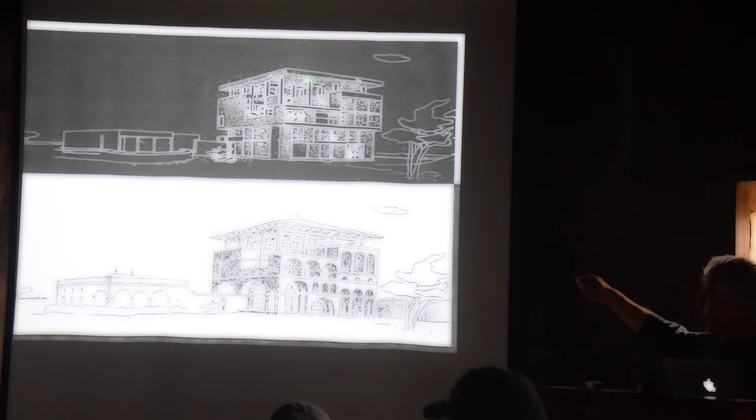This is the great one, the thing I showed—very influential in our work at DPZ back 20 years ago, with a fantastic spatial quality in the arch. And the Corbusier really did deliver a fantastic, unprecedented urban quality. It's really great. But we have to teach. I thank God somebody got me excited about this kind of architecture, because what it represents in terms of levels and interior space has been enormously enriching to my practice.

Even though the buildings I did were actually like this—I've done several houses like this, even before Krier did it. And it's fantastic, the combination of a modernist parti with a traditional vocabulary is really powerful.

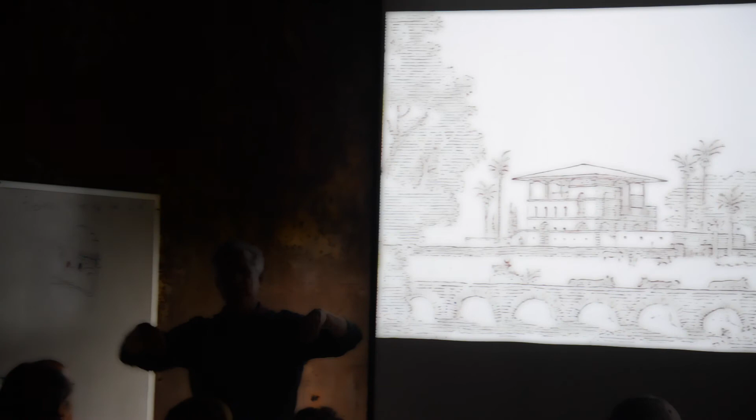So Andrés, can I ask you a question—how do you respond to those who say they built arches back then because structurally that's what they had to do, and in the early 20th century we developed new technologies so we don't have to do that anymore, so let's not do it? What he said is: the Nazis built 900 bridges—some were trabeated construction, 500 were concrete, and they all had to take it down. And they did others that were concrete and arch construction.

They're all still there without exception. He says actually even concrete hates having that corner shoulder. That's his explanation - this is structure anyway. It's better even for concrete. From mud to concrete, this is the way you span a large road.

So that's interesting - I'm making the tectonic argument here because that's the one the modernists use as the most powerful one, that we have a new tectonics based on a new construction technology, so we have to throw the old stuff out.

Can you go back to the slide, the rendering of the buildings that had the two figures in traditional Indian dress? Yes. There's something else extremely nice about this photograph - no one, not a single person, can argue that these people have been stamped on by an exported Western classicism.

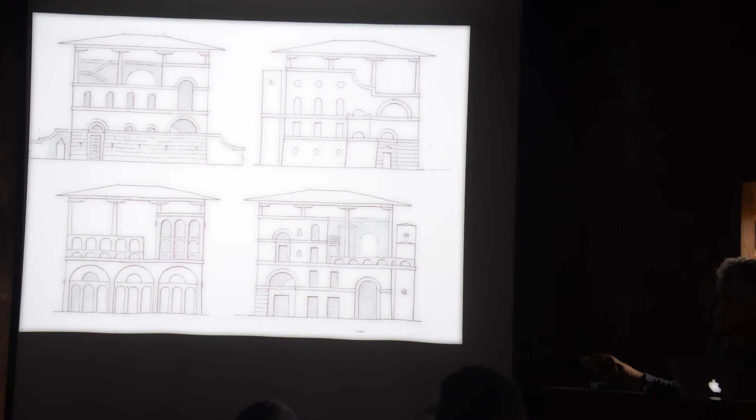So all his work is done on a desk this size, 8.5 by 11, or whatever the A4 is. These are versions, exercises and versions of this wonderful tropical architecture. By the way, this is for the climate, not unlike Charleston. And then he fixes the floor plans - they're actually delightful, they really work. These are early houses - look at this order.

Okay, so right now I'm talking to Catherine, who's building a house that actually has superimposed orders. And so what we've been taught is it's going to be Doric, Ionic, and Corinthian, and good luck working out everything, because each of them has its own rules, and somebody said it had to stack up.

And actually, I say no. Look what Krier does - he gets two parallel lines like this, and just goes up in one shot, he clips them, and they're all Dorics. Okay, let's go home and have a beer because we finished in 10 minutes.

But if you're going to say no, it's got to be worked out according to Palladio, well, let's settle in for 2 weeks, because that's very hard - stacking 3 orders so that it works. And by the way, it's not like your section is going to work ever anyway.

It's a fiction that nobody gives a shit—okay, so he did it. And then I mentioned this, and somebody said, actually, the temple of such and such, the Greek temple—one of you guys said that exists in classicism, there's a Greek temple that does this. And I basically stamped my feet and said, why didn't anybody teach me this? I really resent that. I spent so much time wasted trying to do this Doric Ionic I never believed in anyway, when actually there's this way.

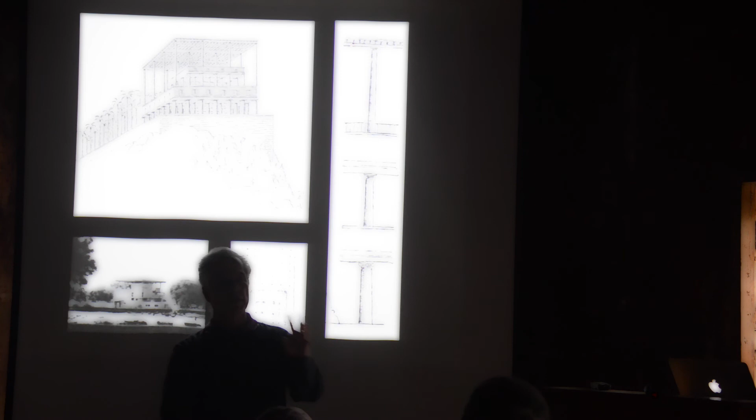We need to teach it. Oh my God, I can't help thinking of triglyphs and metopes—I'm sorry, I know this is unfair, but the guys in the bow ties with that accent, you know, 'well, this is the way we did it in the forum'—I just can't stand the thought of the way classicism is taught, with the bow tie and the orotund accent. Come on, let's just stand in front of a place in New Orleans having a beer, because it's actually possible to drink outdoors, and let's do it.

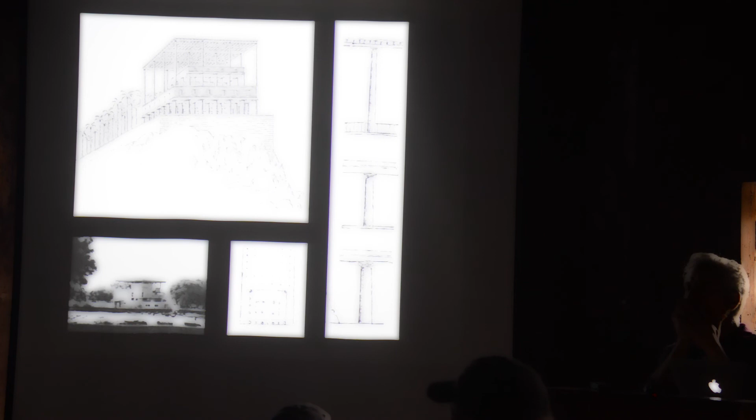One of the things we have is an American vernacular that's much more practical. You're actually echoing a certain hierarchy of building—in a way more correct than a lot of formulaic classicism is, because you're saying that there's the top, and that's reserved for the top, if you really want to do the best—good, better, best. And what you're saying is if it's a house, you can just basically have a beer. And then maybe an office building is somewhere in between.

By the way, 'go have a beer' is a way to communicate with young people—you understand exactly what you're talking about. This is a way of saying let's do it easier, let's move. But above, I get people in my office at the University of Miami, and I say, could we please calm down? It's only a house. Let's not make people suffer about this.

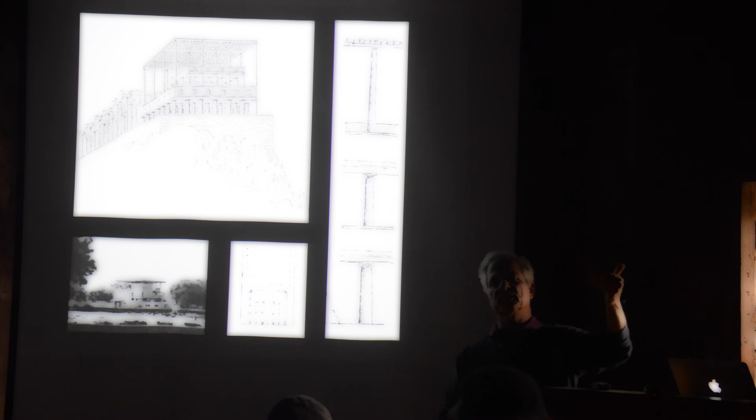By the way, I don't ever want a side elevation designed. A front, yes—side and back, forget about it. Just whatever the bathroom says it wants, you know, and that kind of thing is absolutely stunning. They'll actually resist it—they'll spend a whole day designing a side elevation. Who gives a damn. So anyway...

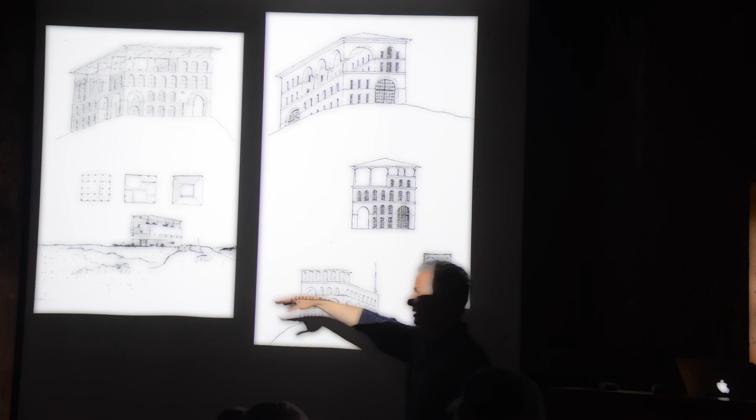Look at these palazzi—oh, by the way, look at this wonderful Le Corbusier house, in which the two double-height spaces actually flow this way, and then the columns go up and form a roof that shields everything. Do you know what this is? Why would you want to do a container house when you did this? The thing about container houses that gets people incredibly excited is that it can do this kind of stuff—let's put something on top.

We've got to deal with container houses, because these poor kids are fascinated—they're such paupers for actually an architecture they can do, that they've now turned the container house into a kind of icon. Well, this is a way—you don't have to do a container house, you can make it out of masonry, and it's just as exciting.

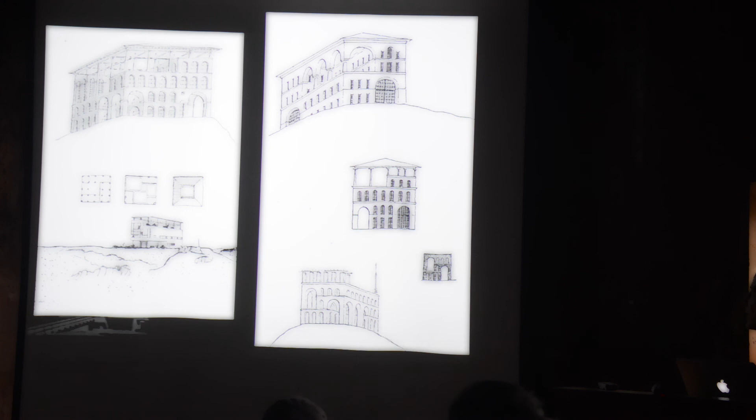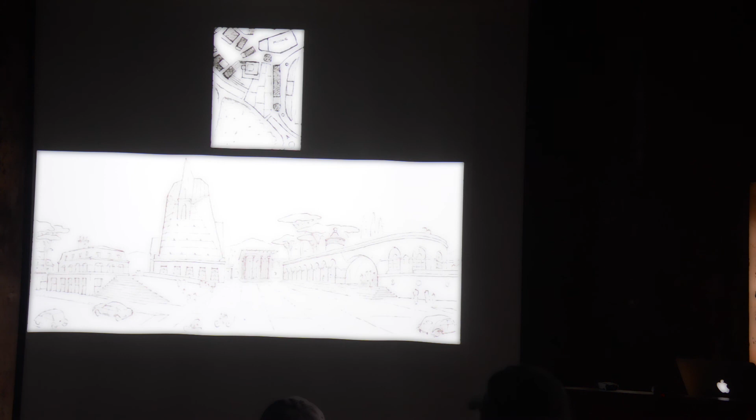So this building—it's a terrific building, but look at it, pulling this forward there. Fantastic, look at that floor plan. Give me that, let's go have a beer. He takes the rigidity of the Corbusier...